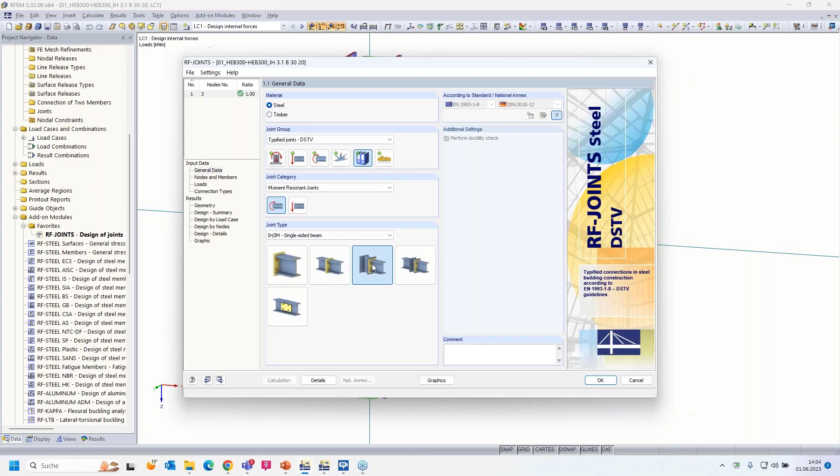I start with our old program, RFEM 5, because there the DSTV connections and all the values are implemented. Because of legal reasons, I can't show you the guideline in this webinar, but I can show you the program. We have a simple model and a moment here, and we would like to define the connection here. And where are the DSTV connections? Rigid connection here. I had only one load, design internal forces, and this is the geometry.

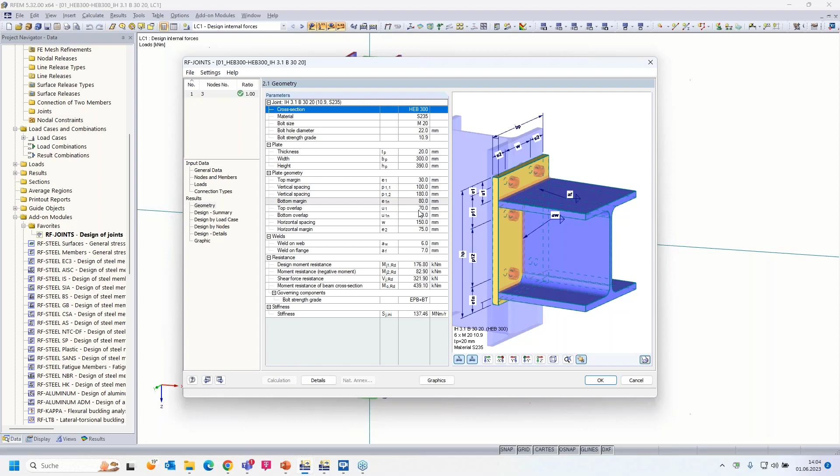I will enter those, or some of these values, in our steel joints add-on. Those are from the guideline. So, that's the design summary. I applied the maximum load of 141.5 kilonewton meter, and I got a design ratio of 100%.

And I would like to design that connection in RFEM 6, and we compare the results. In the first step, only the moment. In the second step, I will combine M and V, the shear force as well. Okay, I can also show the connection in the preview. That's the preview.

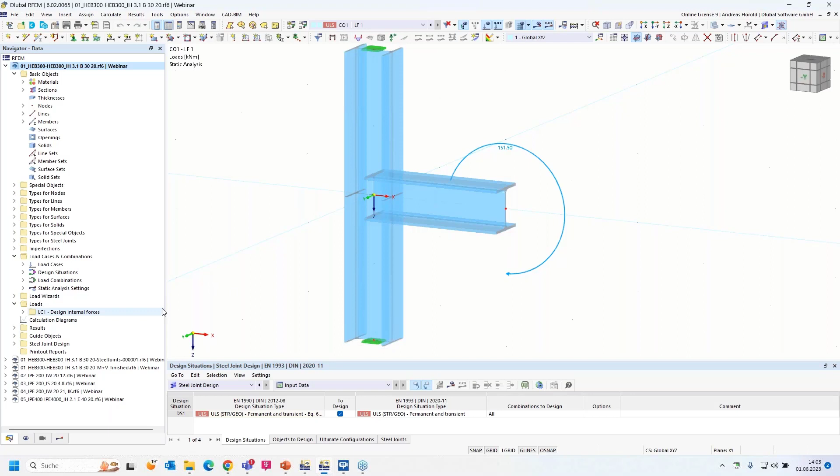So then I turn to RFEM 6, the same model. I had to do some preparations. We can't design a load case in RFEM 6 anymore, we have to define a design situation. I can show it. And the first step, or that's the load case, design internal forces. And there's only one load combination with that load case and the design situation, and there steel joints is activated for it.

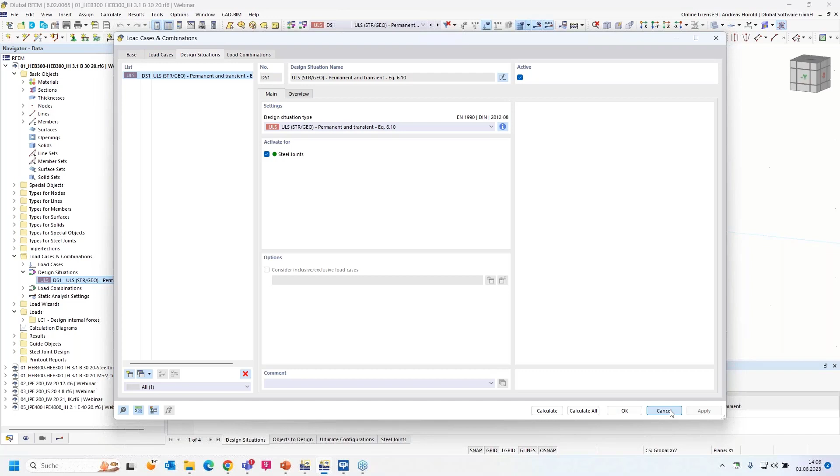And of course, it's necessary to activate the steel joints add-on before. Here, left above, in the base data and under add-ons, it's necessary to do this check here.

Okay, then I start with the types for steel joints. That folder is activated, or will be activated, when you activate the steel joints add-on. So with a double click, I can open the dialog here. I have to assign a node, that node here. Okay.

It detects 3 members, and under members, I have to support at least one end. That's automatically defined. I can change it, but it's quite good to have the support here on member 1. But member 1 and member 3 are continuous. Yeah, that's the column, and the column is continuous.

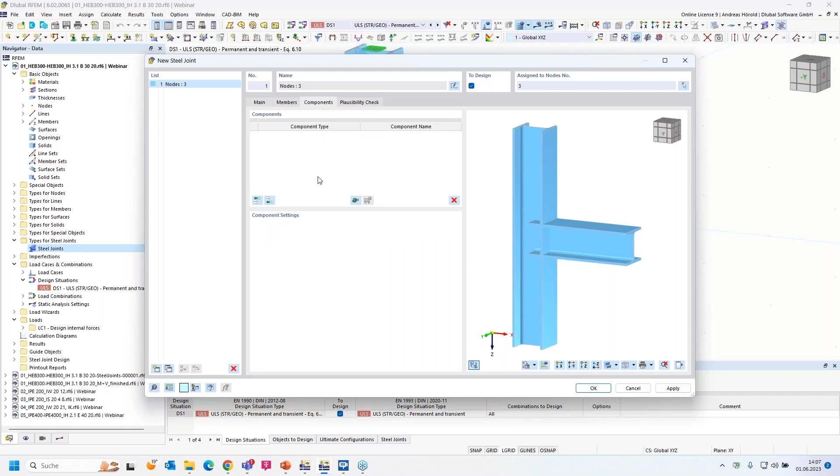Okay, I don't change any base data here for the material or the section, I leave that as it is. Okay, then we have to enter the components. There are 2 possibilities: I can insert a component from the component database, or a complete connection from the library. I will show you both possibilities.

So I start with a single component, an end plate. Now you can see here the different modifications: stiffening elements, plate, stiffener, haunch, end plate, fin plate, cleat, and so on. Okay, I choose the end plate.

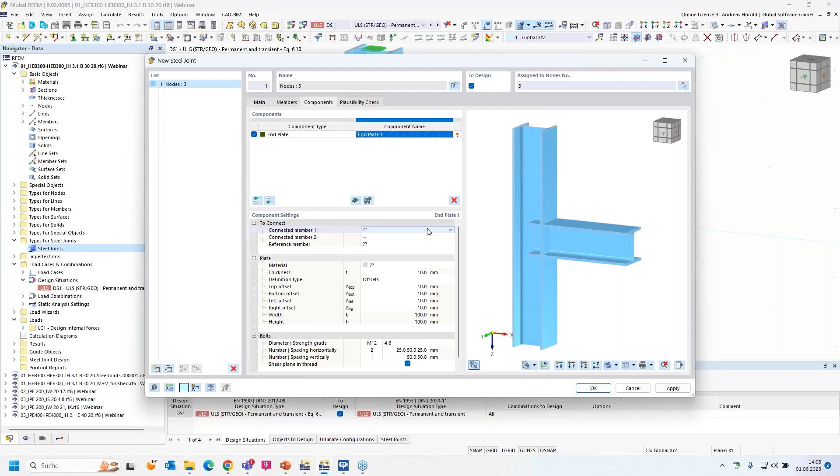The connected member should be member 2. Here you can see in the window on the right side that it's selected with yellow lines. Maybe I can zoom in a little bit so you can see the changes. The reference member or members are automatically detected, so the material of the connection should be the same as for the members.

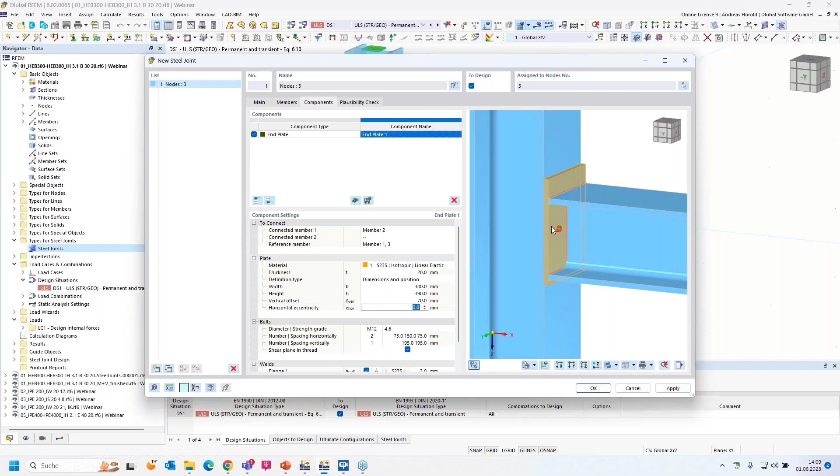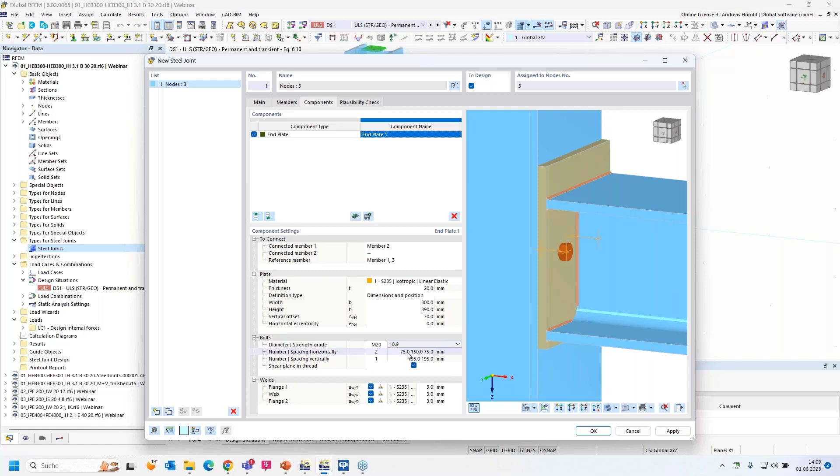Bolt M20, and the strength grade for this rigid connection is 10.9. This is already good, but we need 3 spacings here, and we can increase the window a little bit. Now I have to enter 3 of the 4 values, and the last value is automatically calculated. So: 30, space, 100, space, 180. Enter.

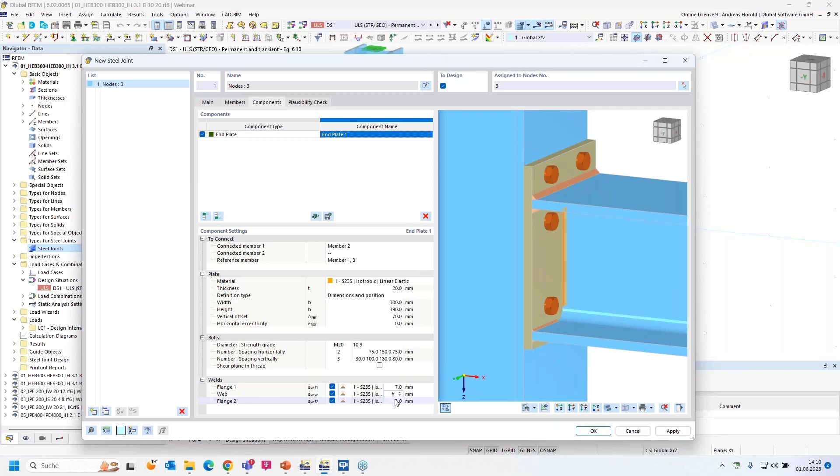So the shear plane shouldn't be in the thread, but in the shank. And at the end we have to define the welds: 7 millimeters for the flanges and 6 millimeters for the web.

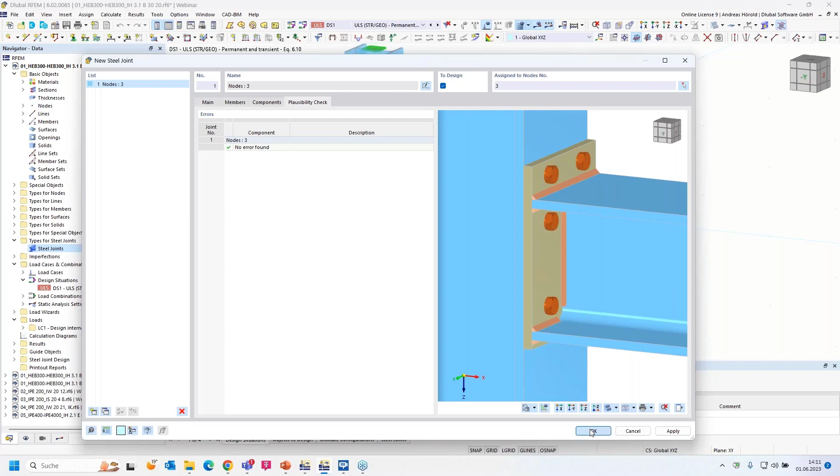Let me compare the values. That looks good. We can do a plausibility check. No error found, that's quite okay. And we can start the calculation. At the bottom I have the button and I can start the calculation.

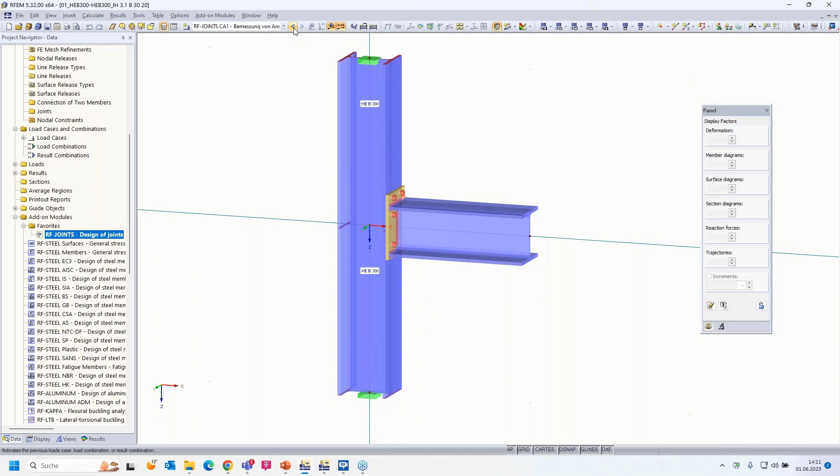Some of you could maybe already notice that I haven't the same moment as in RFEM 5. I can show you RFEM 5 again. The maximum value from the DSTV guideline was 141.5, and I applied a different value. Let me explain why I did that.

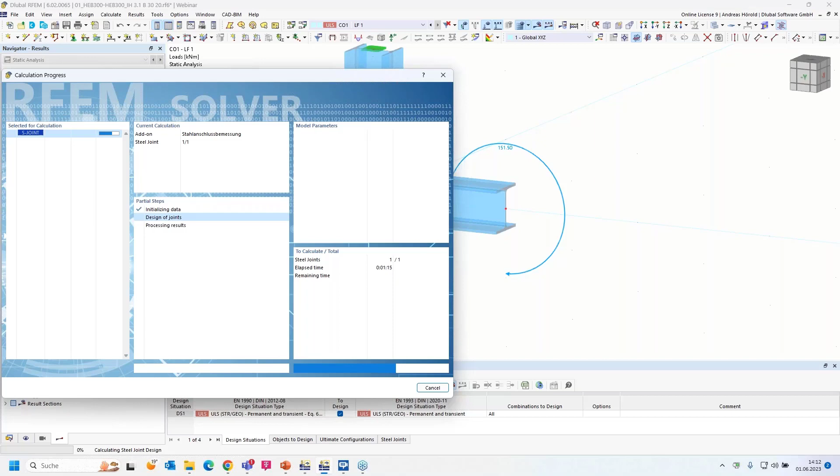I can't apply the same moment and then compare the design ratios, because we have got a non-linear material model, a plastic model, and that's why I can't easily compare the design ratios for the same load. I will explain that on a simple stress-strain diagram. At first, let me wait for the results, or maybe I can already show the PowerPoint so we don't have to wait.

That's the material model for the surfaces and solids. For example, for the end plate and the flanges, it's the isotropic and plastic material model. The maximum plastic strain according to the Eurocode is 5%. We compare the plastic strain with this limit plastic strain from the Eurocode. Imagine we get a plastic strain result of 2.5%, then we have got a design ratio for the plate of 50%.

So we would be in the middle, and then you can't increase the load, you can only multiply that by 2. We would be here, and that's why I didn't apply the same load as in the DSTV guideline and compared the design ratio. I hope it is clear. But when you get a design ratio of 0% for the plate, then you are in the elastic area of the stress-strain diagram for the end plate, for example. It's a little bit tricky, but we can only compare the plastic strain.

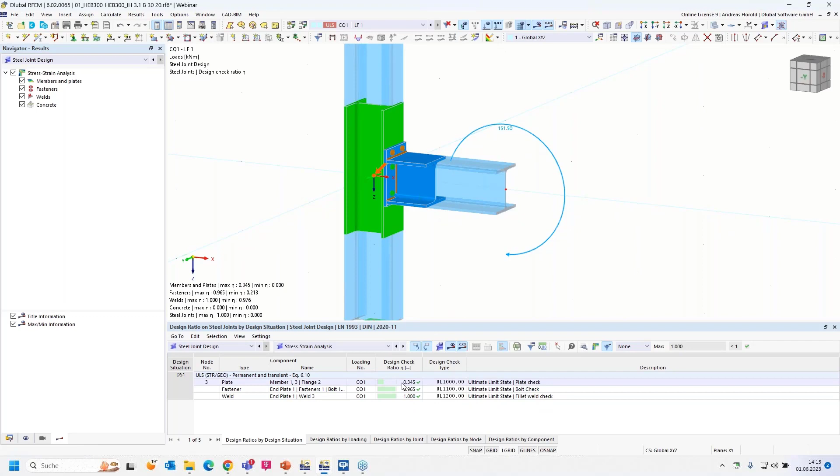When you have a design ratio over 0, then you are in that plastic area here. Let's try that later with an example, maybe then it's clearer. I turn back to RFEM 6, and I get the design ratio of 100% for the weld. For example, when you double click on that line here, you get the design ratio for the plate: about 34.5%, because the maximum plastic strain is 17 per mille.

And the maximum plastic strain is 50 per mille or 5%, and we compare those two values. So, let's turn back in the dialog. Those are the formulas and the design for the welds.

And if you want to see the submodel in the background, the program creates a submodel with surfaces and bolts or welds for the bolts, and so on. I will show you that model, and I would like to show you where you can find it. You can click on that button, left above here.

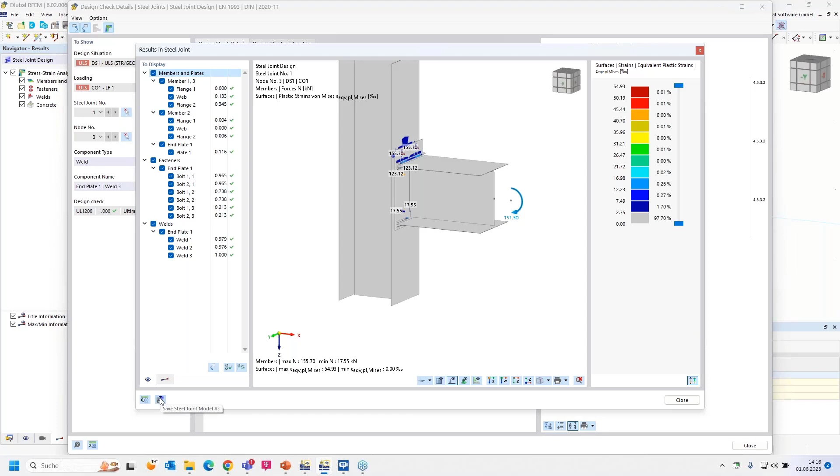Then you can see the design ratios. You can, for example, switch off some parts and so on. And at the bottom left, you can press that button and the submodel, the calculation model, is saved. So let's turn to that model. I open it, and that's the calculation model.

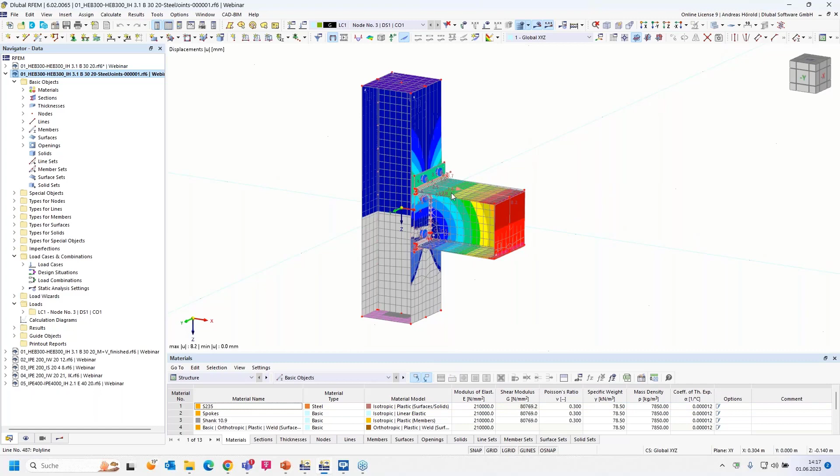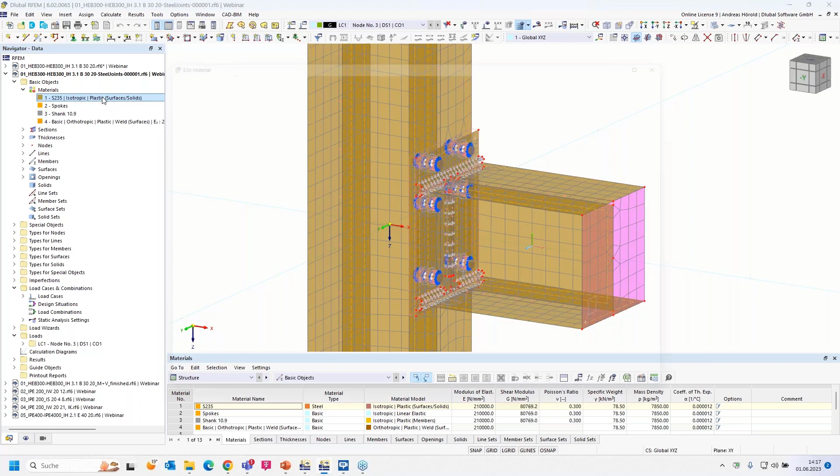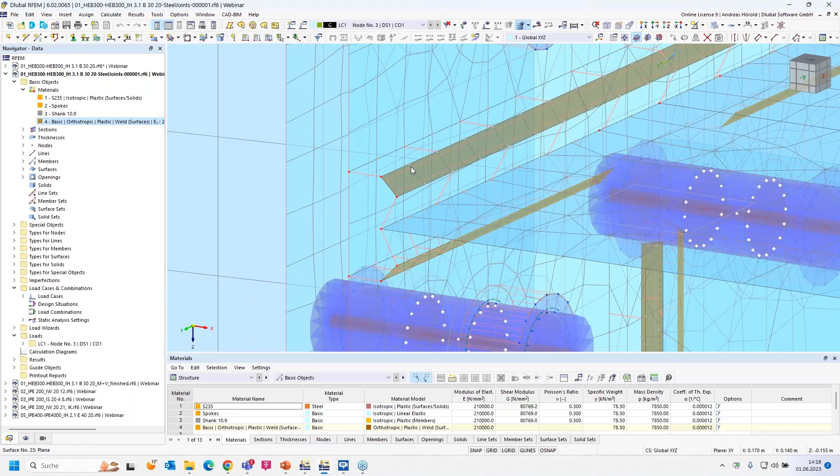Maybe I switch off the results and show the different materials. That's the material for the plate, the flanges, and webs, and so on. You can see it's an isotropic plastic material model. If I double click on it, I can see that diagram I already showed in the PowerPoint. Now you have spokes for the bolts and shank, and those are the welds, the weld model. You can see the plastic material model for that surface here, and such rigid links. Okay, that's our calculation model.

So then I turn back to the PowerPoint. Our first connection, I showed you the values in RFEM 5, the maximum DSTV value 141.5, and I applied 151.5 in the steel joints add-ons. It was a lot of time to prepare those connections. I had to try until I reached the design ratio of 100%.

And when I compare both moments, I get a ratio of 1.07. The maximum moment in steel joints is 7% higher than the DSTV guideline, but only when I apply the moment only. I have also combined M and V, the moment and the shear force. The maximum shear force according to the DSTV guideline is 321.9.

I applied 89% of the maximum values, and I got a ratio of 98%. In that case, we are lower with the maximum load. I can show you the model.

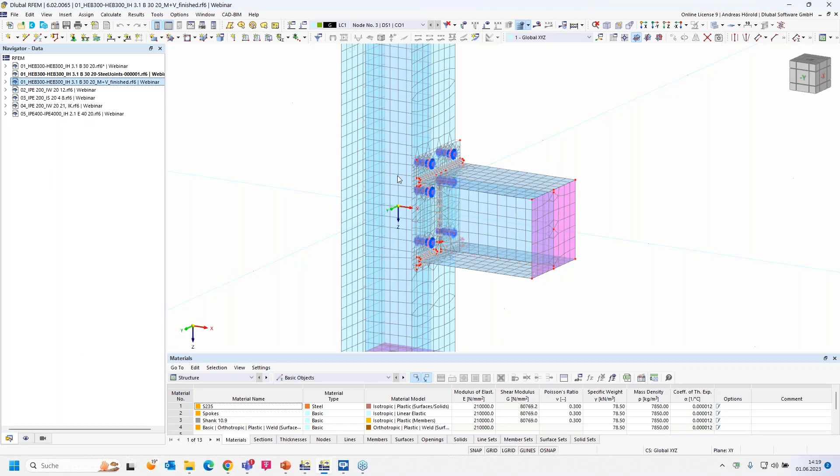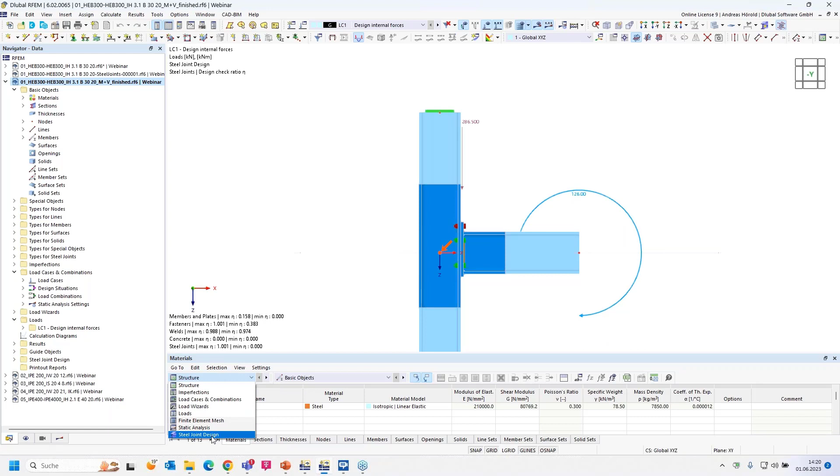So that's the same model, and maybe I can switch on the transparent model. I applied shear force here and the moment, and both are 89% of the maximum values according to the DSTV guideline. And I got a design ratio of 100%.

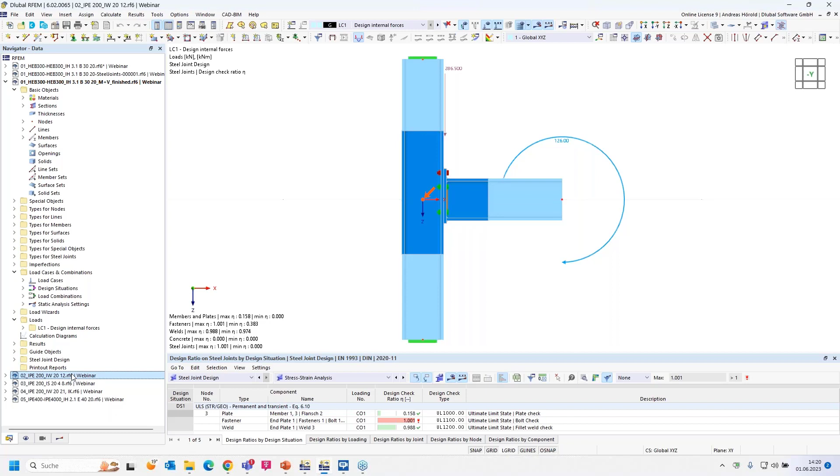Okay, then we turn to the next steel joint, next connection. Also a simple model, a main beam and a secondary beam. We have got one load and we get a shear force. I can show the shear force.

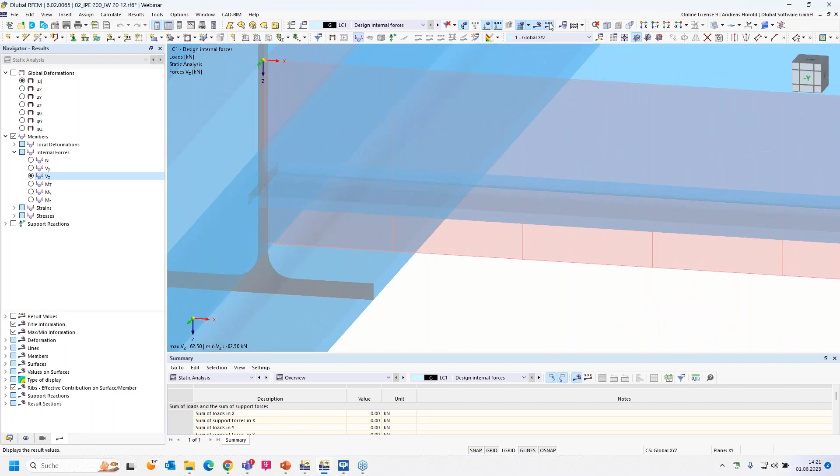Is it? Oh, it's not calculated yet. The shear force should be the half of 125 kilonewton. Internal forces we set with values. Okay, yeah, 62.5. Okay.

So I turn to the steel joints, to assign the node. Okay. Yeah, one member should be supported, that's okay, and the main beam should be continuous.

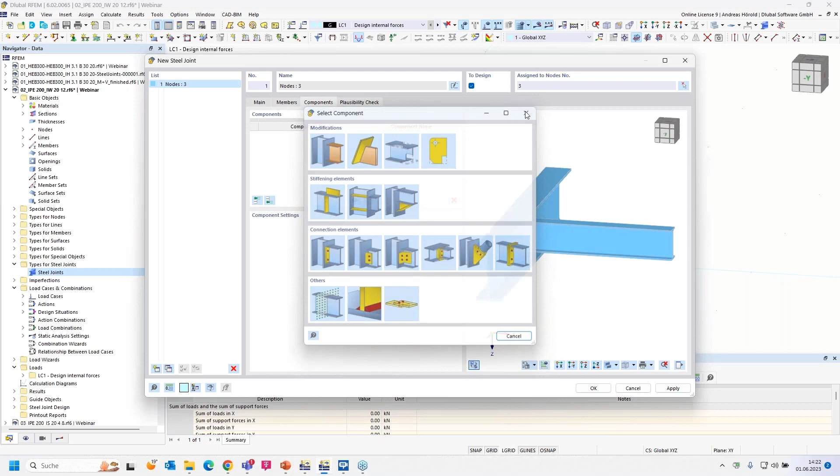So, and this time I don't use, I could use the components. Here you can see the cleats. I would like to assign a cleat. This time I use the component library with all the predefined connections.

So then you can see the general categories, the rigid connections, beam to beam, beam to column, with haunch, column stiffeners, and so on. Then the pinned connections, cleats, fin plate, and so on. Then the trusses, welded trusses.

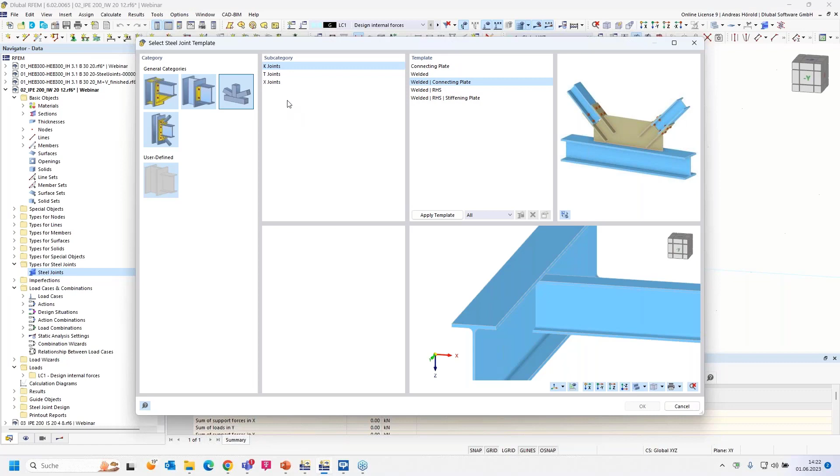Well, we already have got a lot of connections implemented. Then the bracings, and we will extend that library continuously.

I turn back to the pinned connections, beam to beam, and I would like to define a cleat or two cleats on both sides. That's why I have to apply the template, and we have to wait a short moment, and then we can see in the preview the two cleats.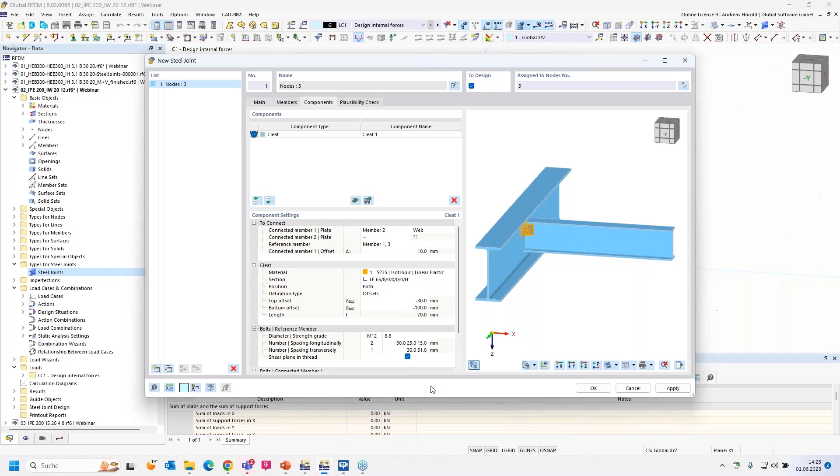We leave the library and we have got to do some modifications. So, okay, I zoom a little bit in. Okay, member 2 is the member that needs to be connected. That's the main beam 1 and 3.

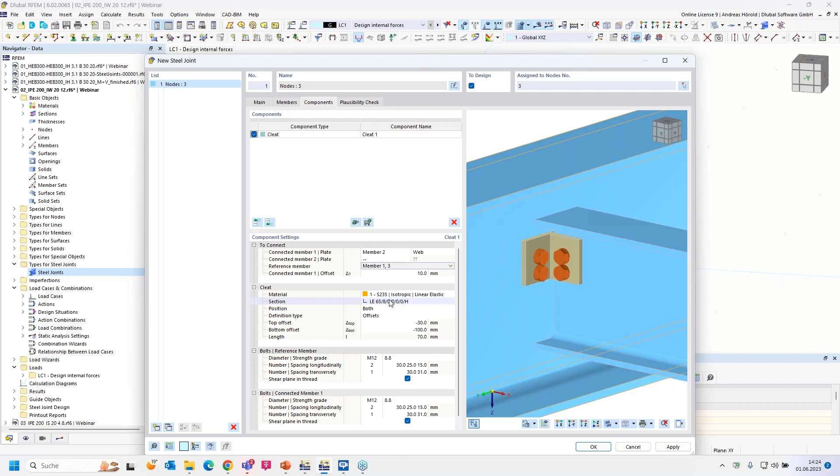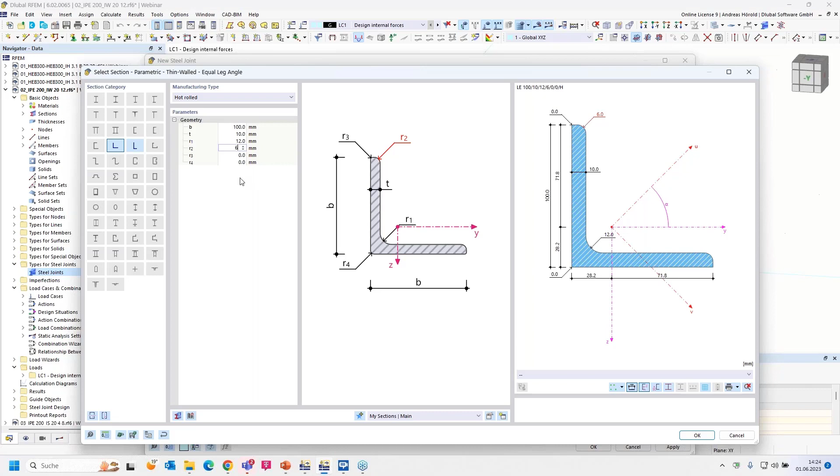So the offset is 10 millimeters, that's okay. Material is okay, S235, but the section needs to be modified. I select an equal leg angle. The width is 100, thickness 10, then 12, radius and 6. That's okay.

So the position should be, it's clear on both sides. I can only also assign only one cleat. In my eyes, that makes no sense. Both. Then definition type, I like the length and position to enter the values. Length is 150 millimeters, no eccentricity.

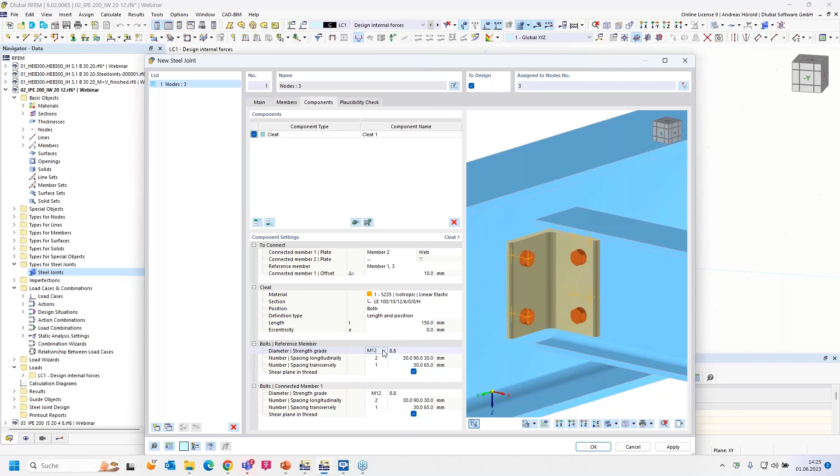Okay, then the bolts. M12, but this time M20, and the strength grade this time 4.6. So I have to enter only one value. The other values are calculated automatically. The same for this. 30. Okay. Shear plane in thread, no.

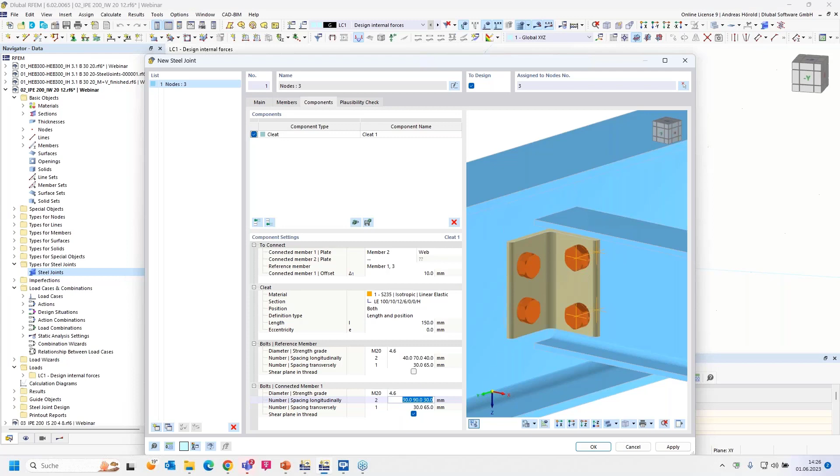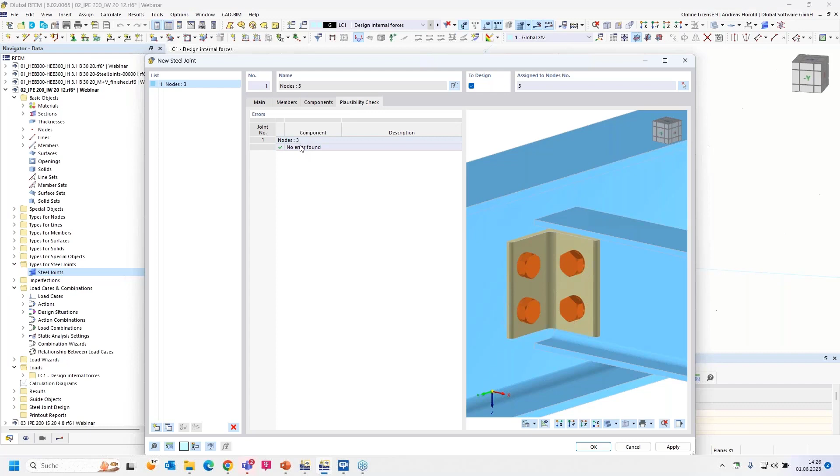Then for the other side, also M20 and 4.6 as strength grade. Then 40 and 40 and 55. And shear plane not in thread, but in the shank. So, okay. Then the plausibility check, no errors found.

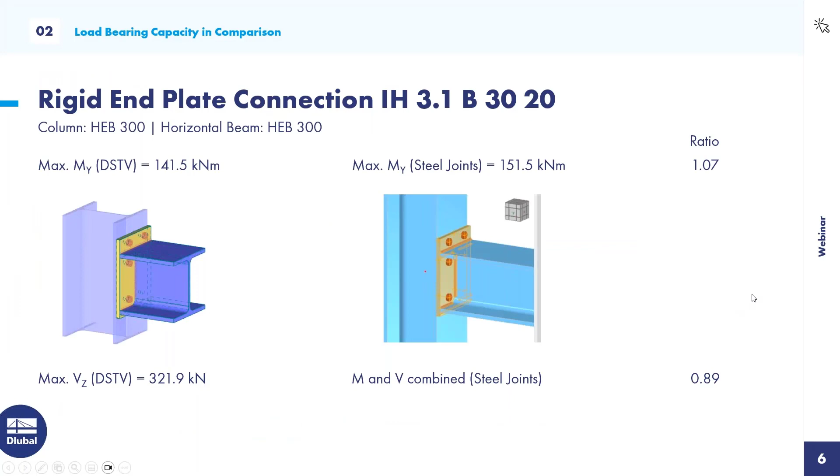Okay, I can calculate the connection. So, and in the meantime, we open the PowerPoint again, so that we skip the calculation time.

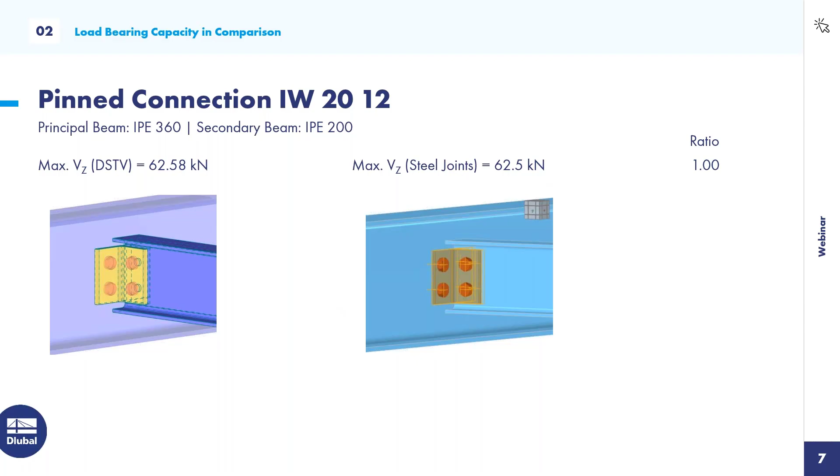Okay, let's turn back to RFEM 6. It takes some seconds in combination with the GoToWebinar software. It takes a little bit longer than without, but we have to wait.

And the design ratio is 100%, about 100% for the fasteners that time. You can double click on it, or you can also use that button here, design check details, and you also reach the dialog.

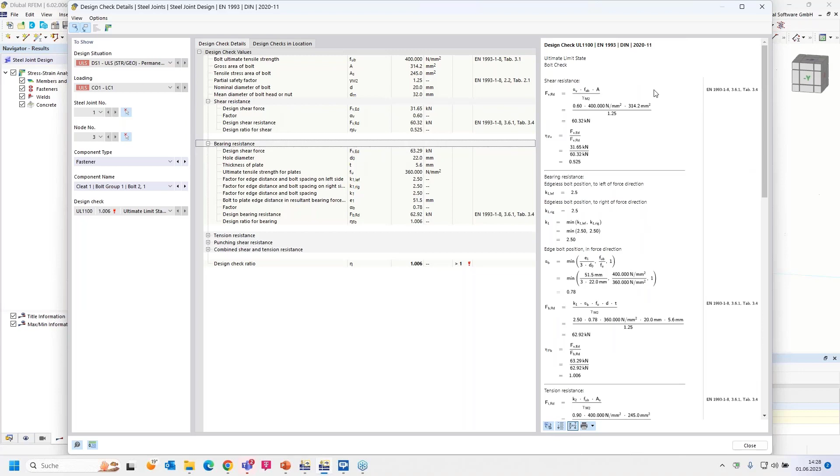And that's the design check ratio for the bolts. And you can see all the equations from the Eurocode here. Okay, that's all for that connection.

We turn to the next prepared model. Now, the same model you can see in higher load, and I would like to apply another connection with a thin end plate. So that's why I open again here the steel joints dialog.

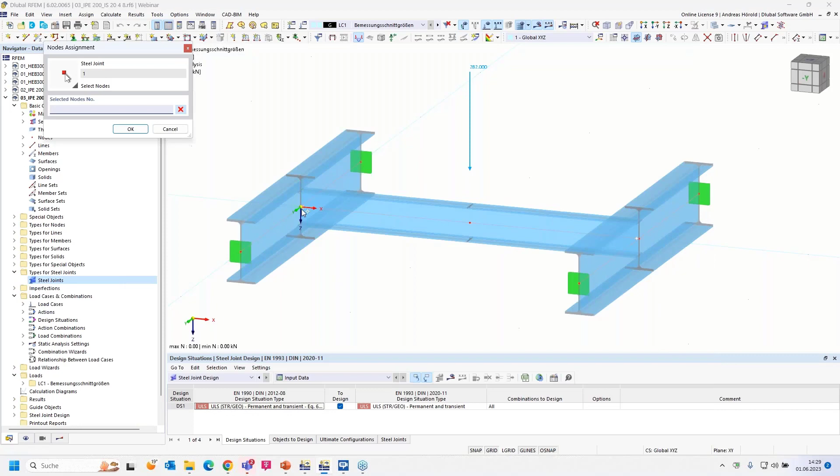The same node number 3. Oh, it didn't get it. Okay, now.

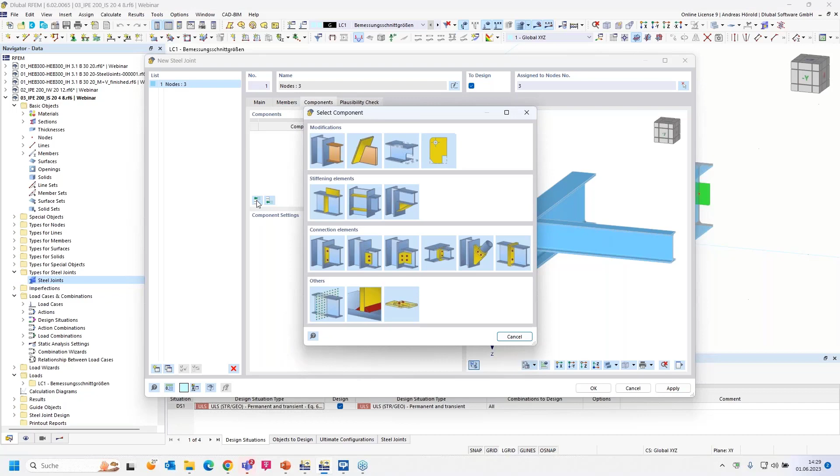Members, one supported end, and the main beam is continuous. So the components, I use an end plate.

The connected member is again member 2, same material as for the members. The thickness, a thin plate, 10 millimeters according to DSTV guideline. Dimensions and positions, 160, 150, minus 25... oh no, minus 25, 0, no eccentricity.

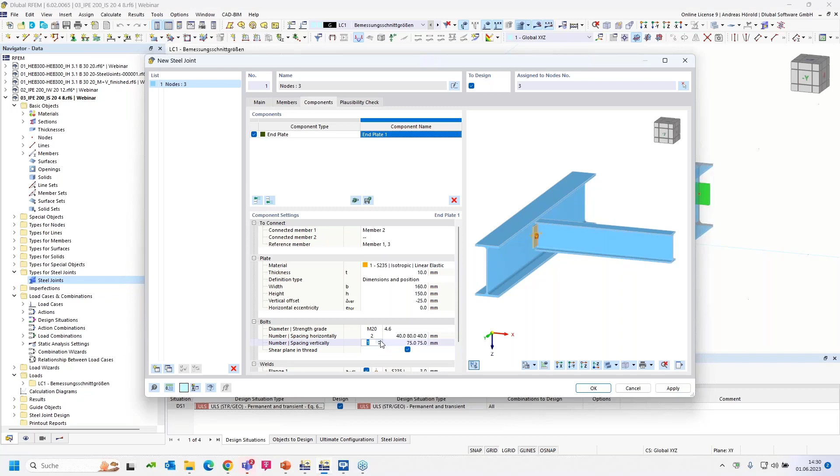So then the diameter of the bolts are M20. Didn't get it. Okay, M20, 4.6 is okay. The values are okay, but not the number of bolts. So, and then 40 space 70. Okay.

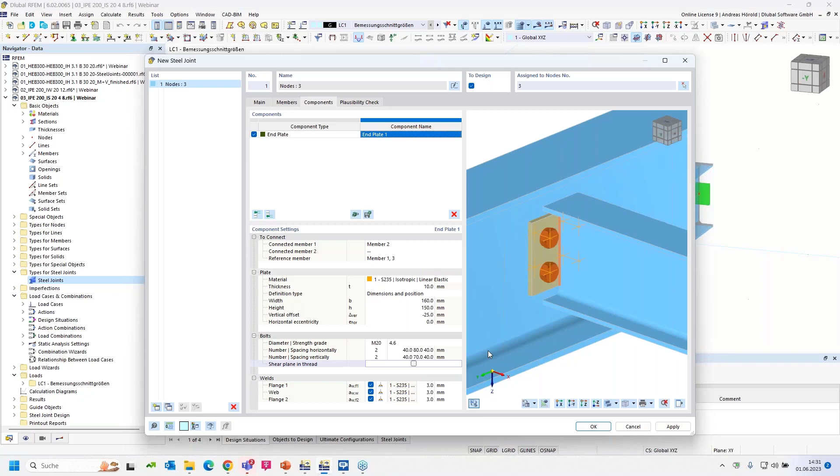No shear plane in thread. And if you zoom in, you can click on the welds. You can see there's no weld for the flange. We can deactivate it. But for the web, you can see it's selected, and we leave the 3 millimeters.

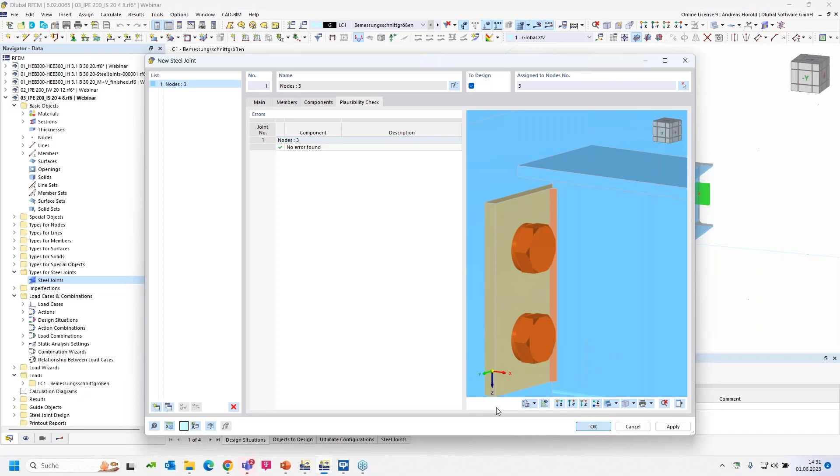Okay, then let me do a final check. Oh, that's okay. So then plausibility check, no errors found, and we can run the calculation.

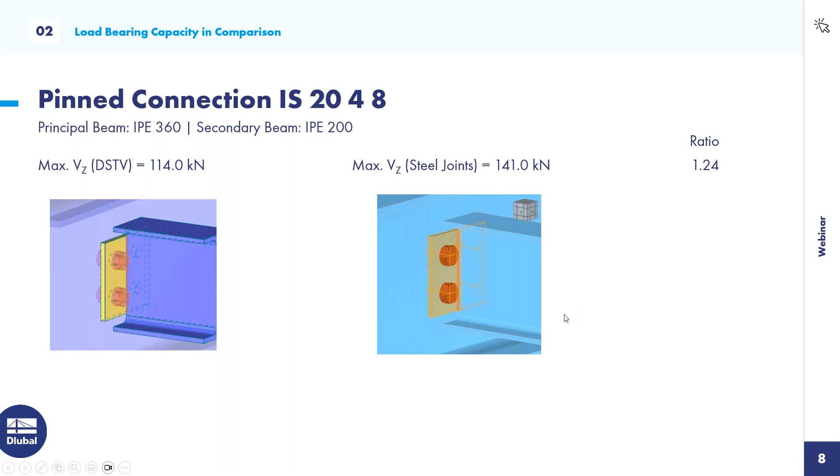Okay, let's turn back to the program. It's already calculated. This time the weld has the maximum value.

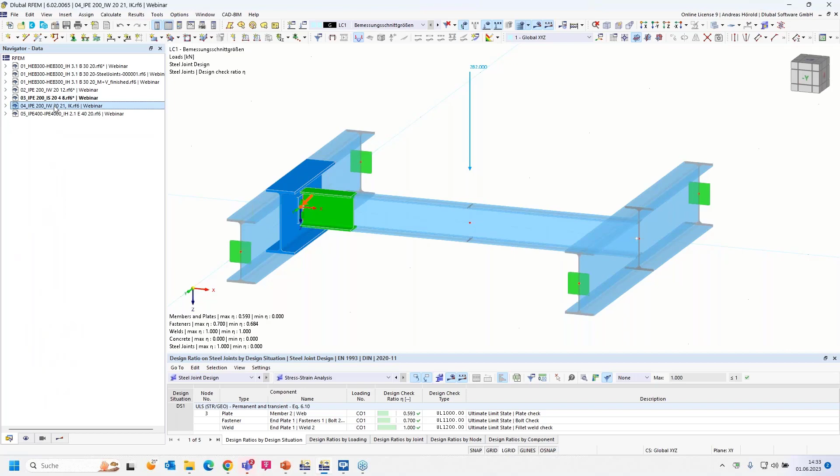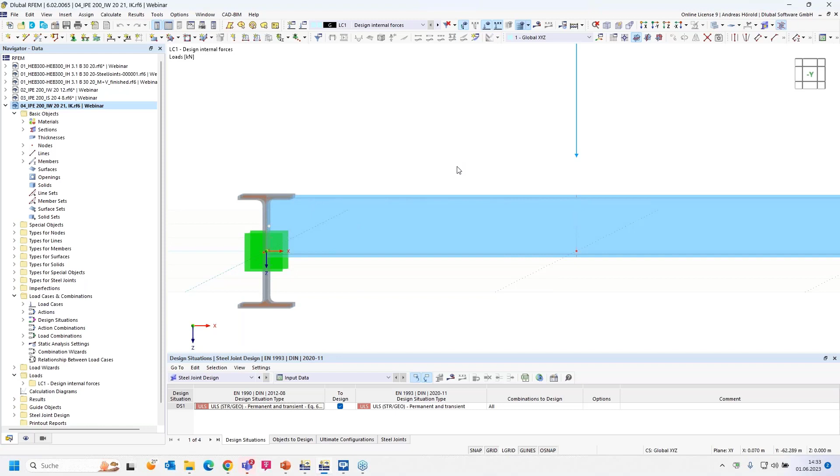Okay, then to the next connection or the next prepared model, almost the same model, but I applied an eccentricity for the beam here, for the secondary beam. That means that we have to cut the member. Just imagine there are a grating or a sheet on the top of the beams. That's why I defined such an eccentricity.

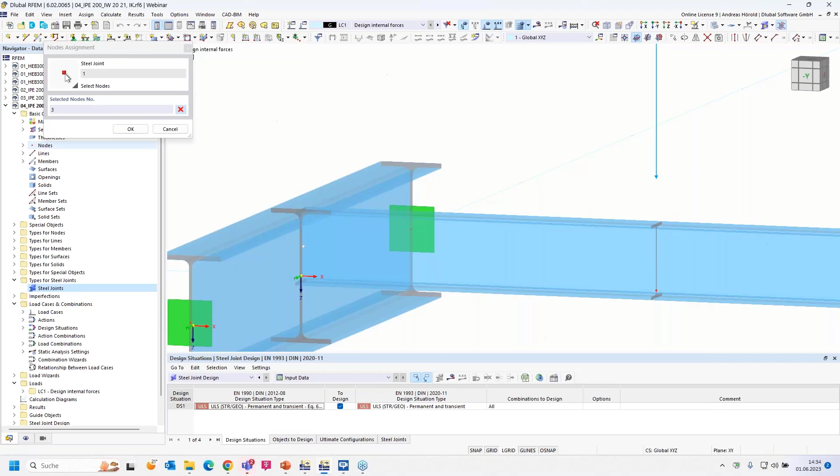So, okay, and we have considered that in the connection. So I open SteelJoints again. I have to define or select the node. Then the same procedure here.

So, and now I don't define connection. I already defined the connection before the webinar and saved it in the library. And now I would like to load that connection from the library. That's what you can do for your connections as well.

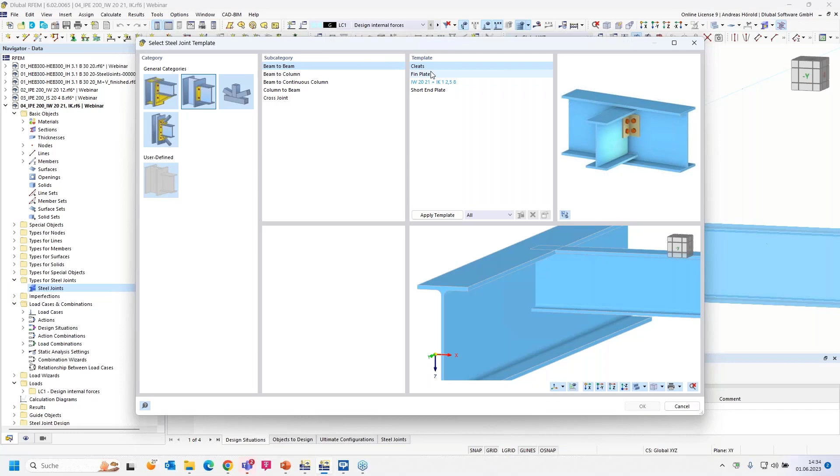It's a pinned connection. A pinned connection. And now you can see the beam-to-beam templates here. And you can go only the predefined or only the user-defined connections. There's only one connection or all. So, and I select it and apply the template.

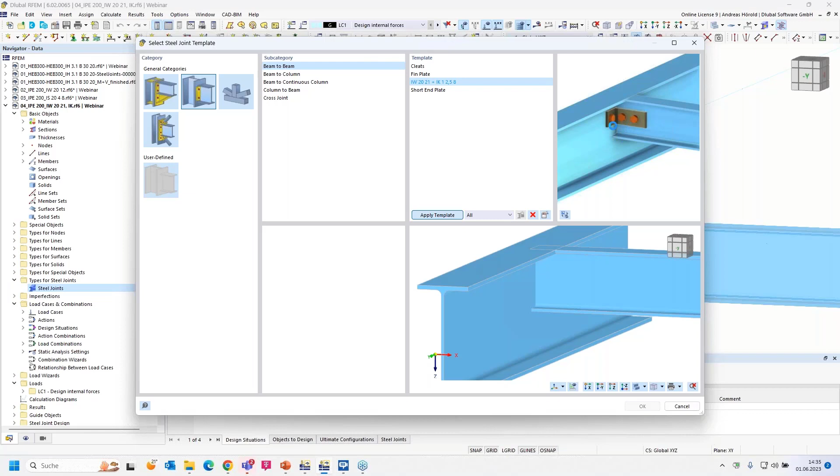And the template contains the cleat and the member cut. We can see that in the preview here. Okay, so we leave the dialog and load the connection. Now you can see the cleat and the member cut. So we do a plausibility check.

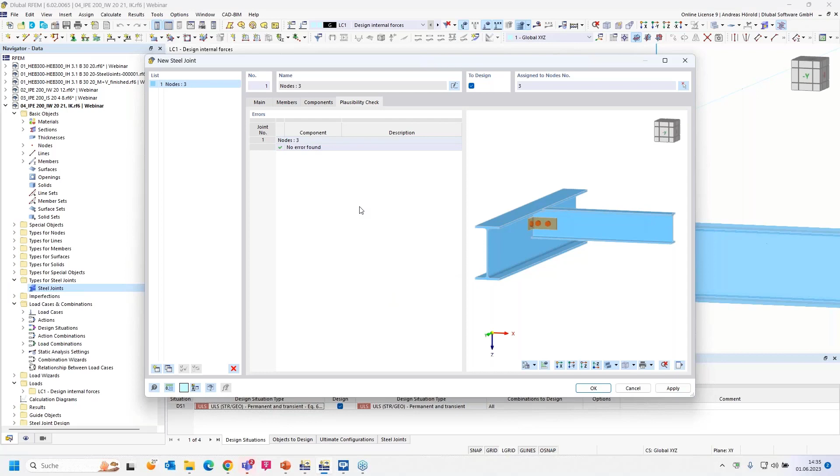No errors are found. So, and we run the calculation. So we turn back to the PowerPoint.

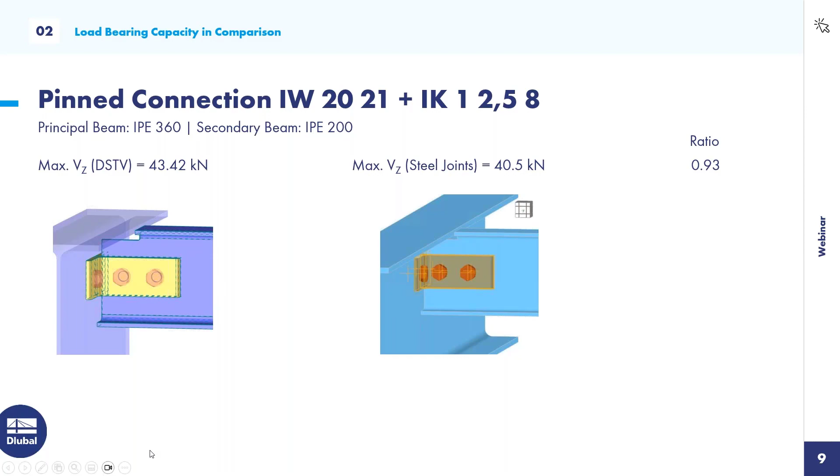So we turn back to the program, and you can see the maximum value is for the plate about 100%. You can double click on it, and you can see the maximum plastic strain is about 5%.

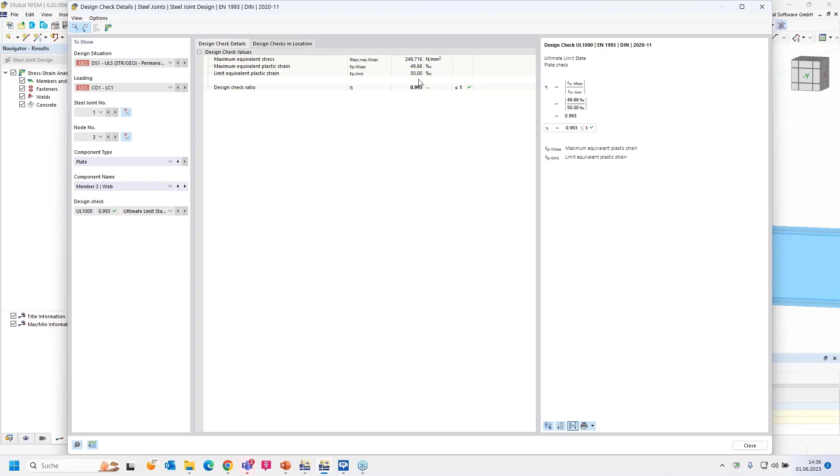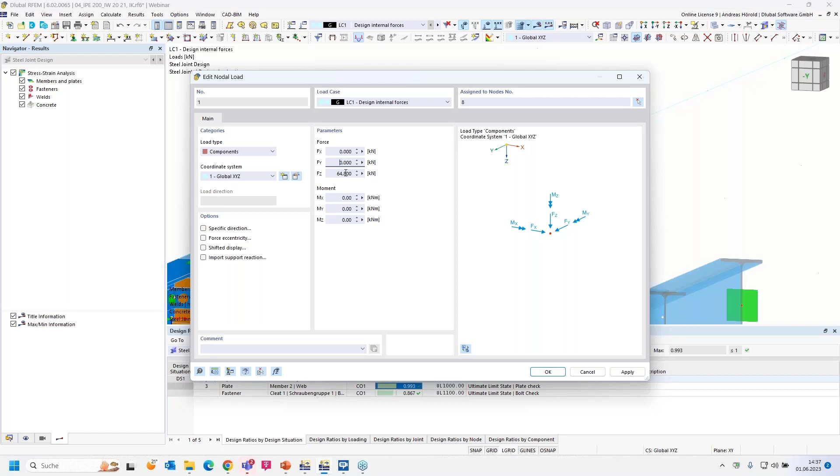So, and now we can try that. We can decrease the load. Yeah, for example, I can apply only 80% of the load on the connection. I can enter a formula here: 81 multiplied by 0.8. Okay, and the program calculates the value automatically.

So now we have got only 80% for the load, and if we run the calculation, we don't get a design ratio of 80% for the plate because of the nonlinear stress strain diagram, the nonlinear material behavior. Yeah.

You will see that. It's 43% now.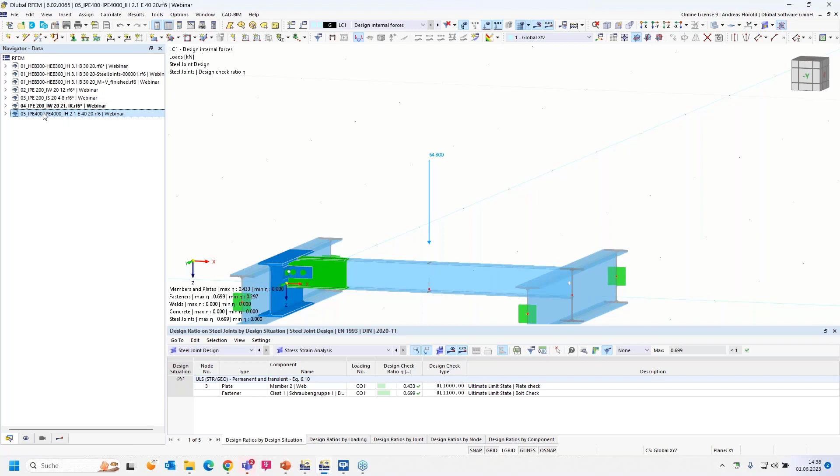Okay, then we turn to the last connection for today. IPE to IPE 400. And I would like to apply a rigid connection here with end plates.

So types for SteelJoints, steel joint. I have to assign the node here in the middle. Okay. Members are supported, or one member is supported.

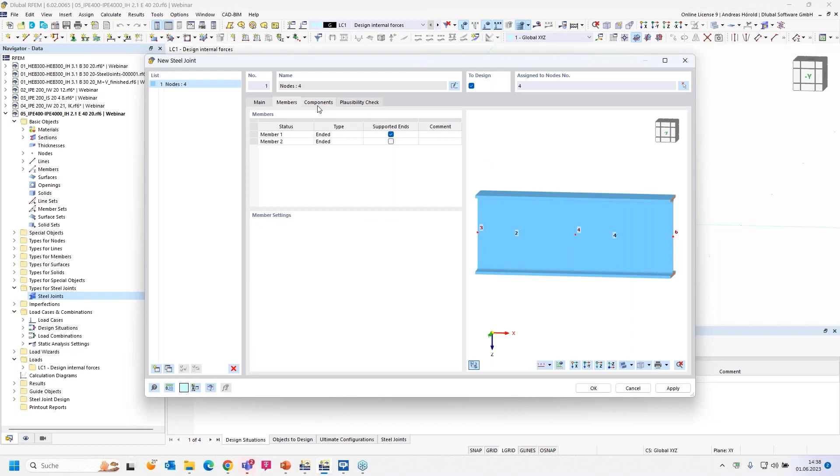And I load also a component from the library. I had, before the webinar, prepared such a connection, rigid connections, and you can see here the defined connection. And I apply the template.

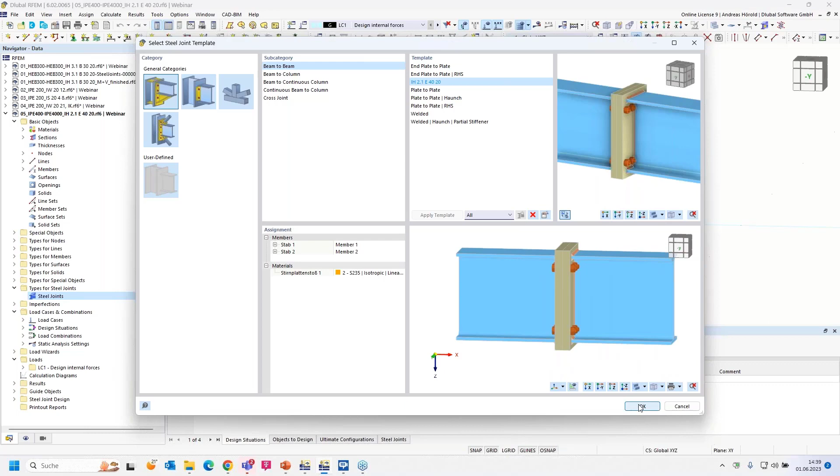Okay, so if I press OK, it overtakes the predefined and saved connection. You can do a plausibility check. That's okay.

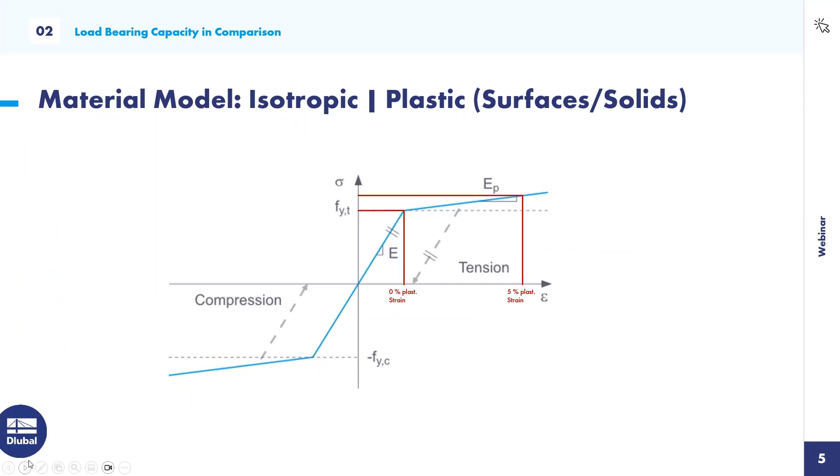Okay, and then we run the last calculation. Let's skip the calculation time. We turn back to the PowerPoint.

So that's the last connection, Beam IPE 400. The maximum value according to the DSTV guideline is 213.1, and I could only apply 189 kilonewton meters in the Steel Joints add-on in RFEM 6. So we can apply only a load of 89% of the maximum load from the DSTV guideline, and it will be a little bit decreased if I also apply shear force.

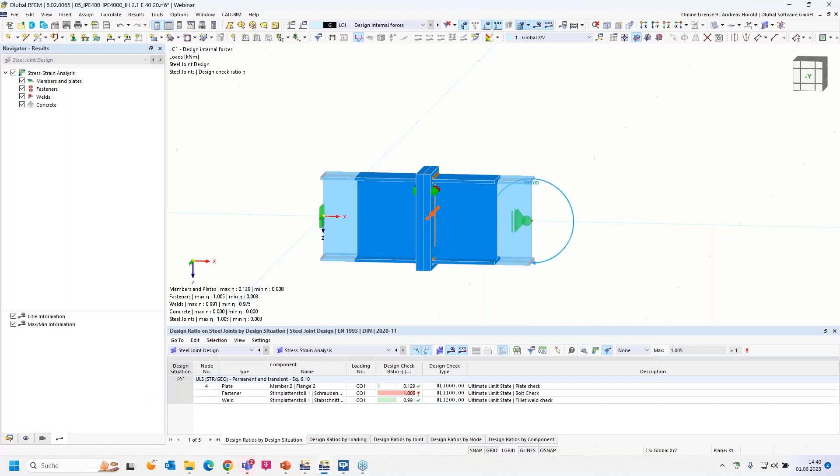Let's show you the results. Okay, you can see 100% for the fasteners. Okay.

I think that's clear. But maybe you ask, why should I use the Steel Joints add-on when I can sometimes apply only a smaller load than in the DSTV guideline, for example, or other guidelines with standardized connections?

Yeah, when you calculate a structure in RFEM 6, for example, and other programs, you usually do that in the 3D model. Then you get internal forces, also MZ or torsion and so on, and then you can't apply the DSTV or other standardized connections. And if you have got, for example, for this connection, only a moment and the shear force, just use the DSTV guideline.

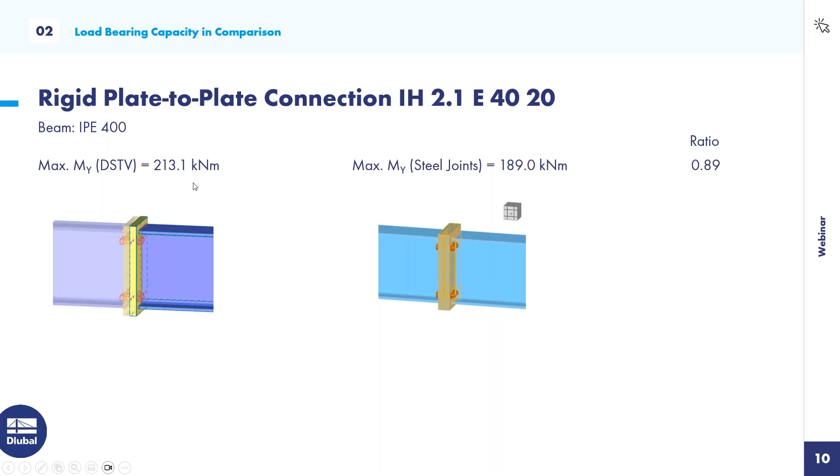But when you have got a 3D structure and you get, for example, torsion or MZ or normal force or shear force in direction of the weak axis, then you can't use such standardized connections. At least, for example, for this connection, when the normal force isn't higher than 10% of the plastic normal force. With the program Steel Joints, you can consider all those three-dimensional internal forces.

And that's, in my opinion, the best feature for this add-on, the main advantage. A further advantage is you don't have to import the internal forces from external programs.

You usually calculate a more complex model than I did in this webinar. Then you pick the nodes and you create the connection and calculate it. You don't have to import any internal forces, and these internal forces and moments and so on are always up to date.